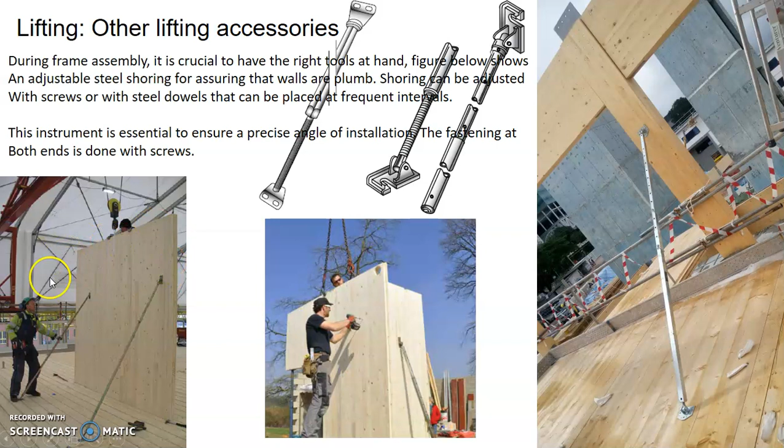This instrument is essential to ensure a precise angle of installation. Fastenings at both ends are done with screws. You need to temporarily stabilize the vertical element before it is connected by the rest of the member, and once it's connected and stabilized, you can remove it.

Another device is what you call the beam grip with ratchet and hooks, and this is how it looks. This beam grip with ratchet and hooks is primarily used to bring the panels together once they are supported, because when you are doing the lifting, it is impossible to lift it in such a way that it is perfectly aligned to each other. So there will be a gap. You use the beam grip with ratchet and hooks to close the gap.

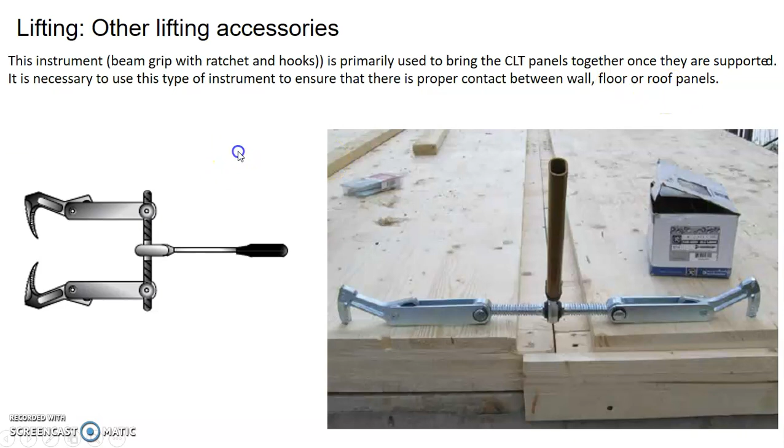It is necessary to use this type of equipment to ensure that there is proper contact between the wall, the floor, and the roof panels. You can actually use the beam grip to connect members that are perpendicular, ensuring proper contact between two panels that are installed perpendicularly.

Instead of hooks, the beam grip is used with two perforated plates. The beam grip is screwed onto the CLT wall and roof panels. The clamping is then performed, and the panels are screwed to one another using self-tapping screws or other systems. Tightening will ensure proper contact between the elements to minimize air infiltration, water infiltration, and sound transmission.

At the interface between the ground level concrete slab and the wall panel, the level may not be perfectly flush. So you need to use either steel shim plates or cement grout to ensure that the interface is perfectly flush. It is often necessary to use steel shim plates of different thickness under the CLT wall at the junction of the concrete foundations, for them to be perfectly square.

Once the wall has been properly installed and it is at the right angle, the gap is usually filled with a cement-based grout. It is important to use a waterproof membrane at the base, between the concrete and the wood, to limit the movement of water into the building.

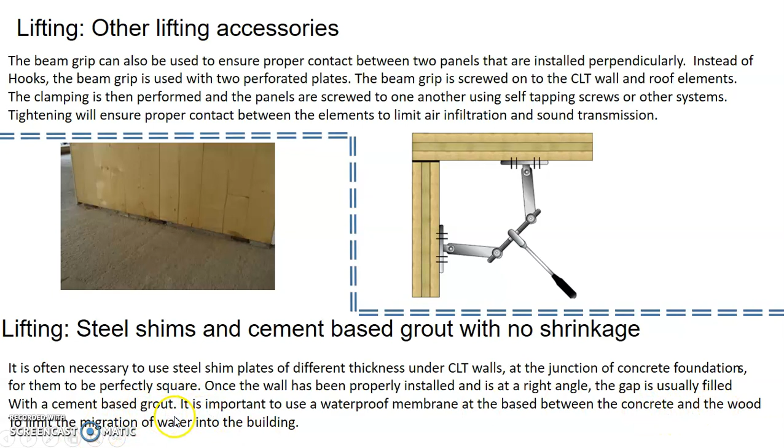Now, in terms of connection, you can actually go for the wood and self-tapping screw as a form of connection. The ease of installation and the high lateral and withdrawal capacity of the screws makes them quite popular amongst designers and builders, as they can take combined axial and lateral loads. The wood screws and self-tapping screws come in different sizes and specific features.

Self-tapping screws are available in diameters up to 14 mm and lengths up to 1.5 meters, while the common length could be around 1 meter. They do not require pre-drilling in most cases, unlike traditional wood or lag screws, which require pre-drilled holes, the size of which depends on the density of the wood-based material they are driven into, and the diameter of the screw. The design capacity of the screws in cross-laminated timber must account for the potential gap in the unglued cross plies and other artificially sawn grooves common in CLT fabrication.

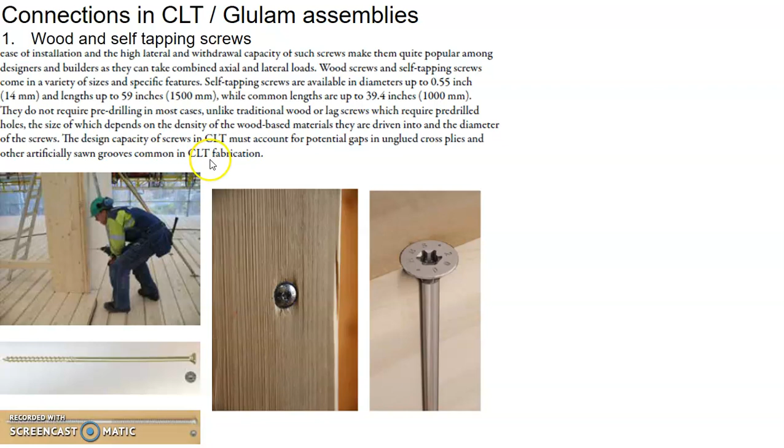So you can see here, for example, when the CLT beam member is supported at this edge, it may actually start to tear along the ply. So in order to minimize the possibility, you can reinforce this location by inserting the self-tapping screw. Or if the compression is very high, it's going to start to deform here, so you can improve the capacity by inserting the self-tapping screws into the member.

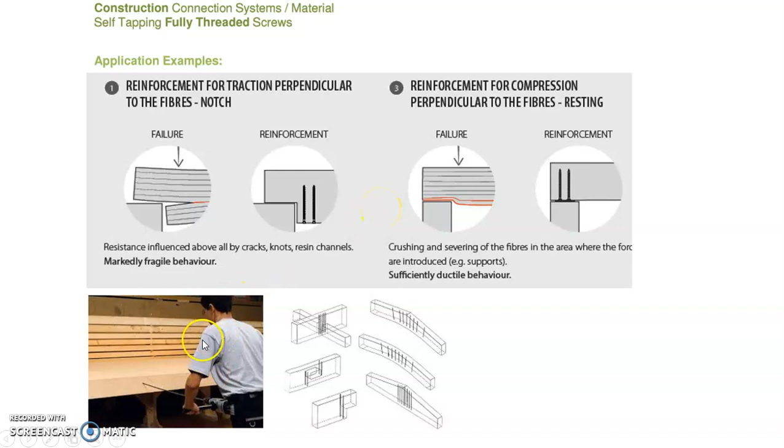So some examples of using the self-tapping screw to strengthen the CLT members or the GluLam members. You can see the worker installing quite a long self-tapping screw. The self-tapping screws also come in different sizes and different lengths, that's available.

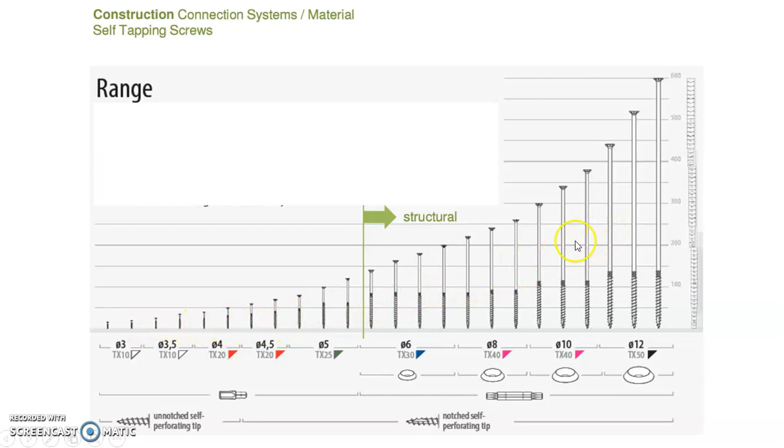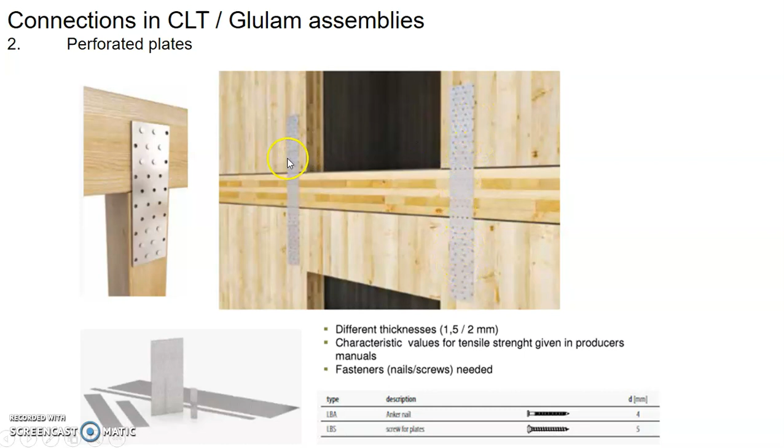Another way to do the connection will be using the perforated plates, and you can see how it looks like here. It comes in different thickness and different characteristic values for tensile strength, and you need to install the fasteners or the screws through the perforated plates. Different types of geometry can take tensile load in a transverse direction also, no problem.

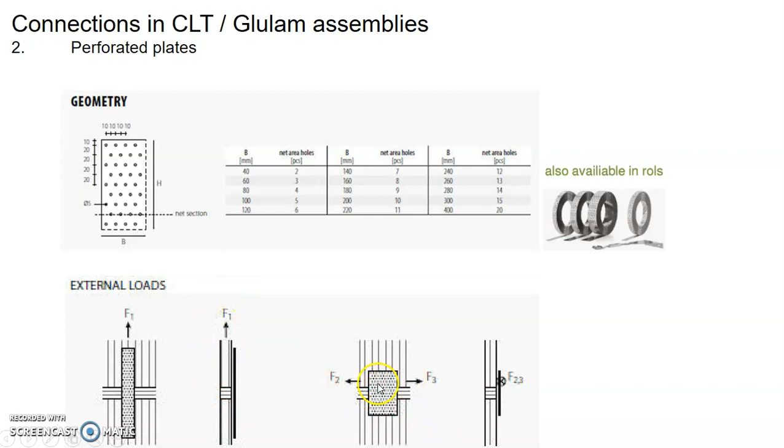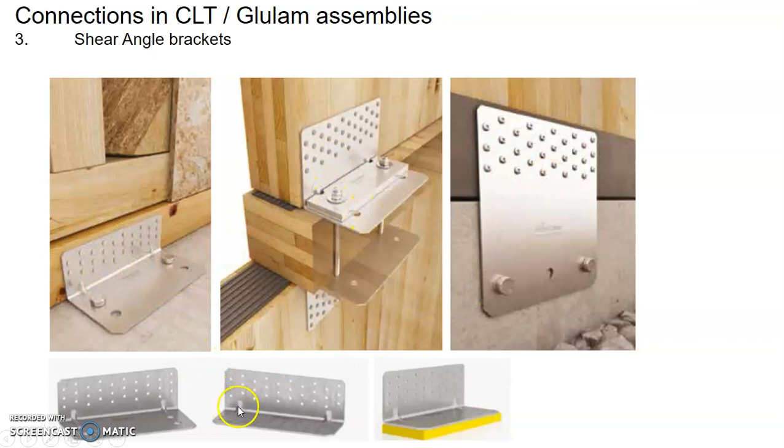You can also have what you call the shear angle brackets, and this is how the shear angle brackets look like. And this is how you can assemble the members using the shear angle brackets. You position the brackets at the location that you want to do the assembly.

Then after that you mark out the holes where you need to drill through the concrete element, for example. So then you remove the bracket first, and then do the drilling through the concrete. Then you clean the holes, insert the anchors, then insert the bracket, then after that you put in the timber element, then you do the fastening.

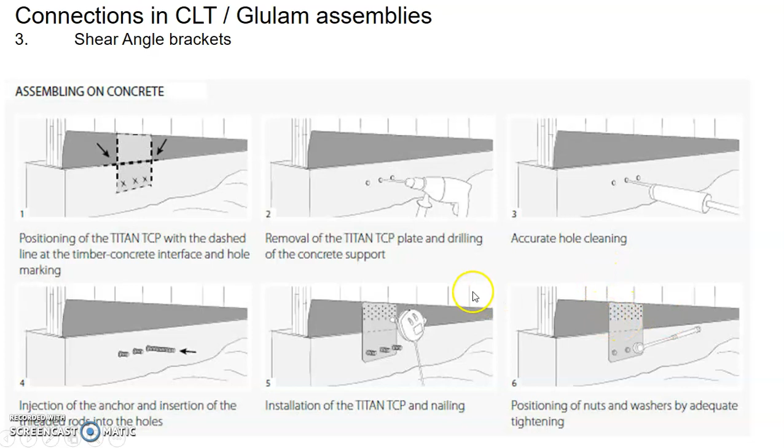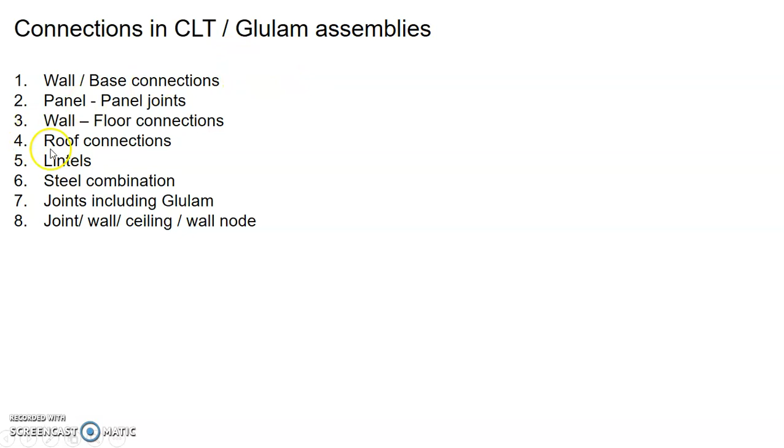Now you can actually connect the different panels or different members of the mass engineered timber together, and in terms of the flexibility of connections, there are many different connections available. So for example, wall to base connections, there are different ways to do it.

So you can see here, for example, this is one way, we call it the exposed metal plate connection. So this is the concrete footing, and if you want to install the timber wall panel on top, you can have a series of metal plates with anchor bolts and all that, then after that you install and connect in this way.

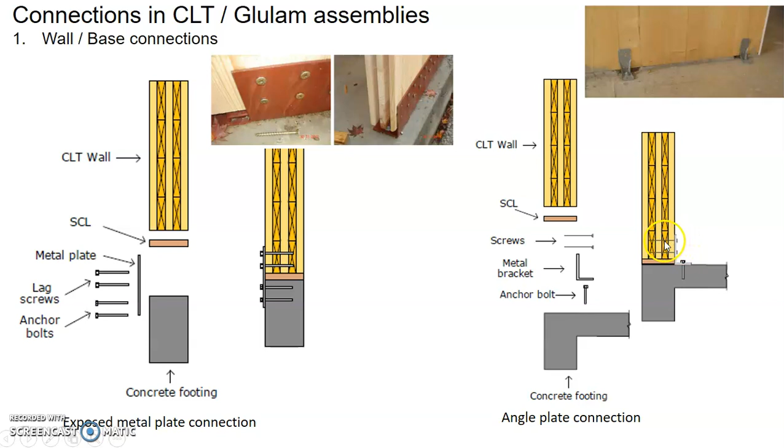That's one way. You can also go for an angle plate connection, where instead of using a metal plate, you use an angle plate, and the connection is done on this side. So it's bolted here, then after that you have the self-tapping screws, for example.

You can also go for a wooden profile connection, where you install the wooden profile so that the timber member can sit properly. The wooden profile comes in a different pattern.

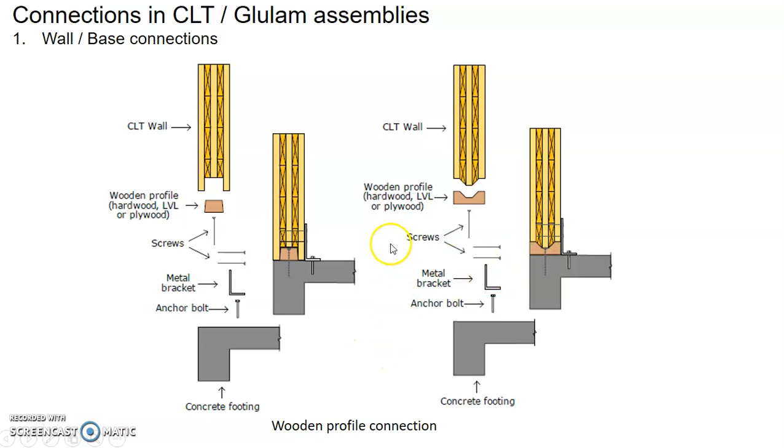You can also go for a concealed metal plate, where you install the metal plate, bolt it to the RC element, then after that your CLT wall comes with pre-drilled holes so that the holes can receive the steel plate. Then after that you insert inside, then after that you put in a dowel bar on both ends, alright, so that's how it looks like.

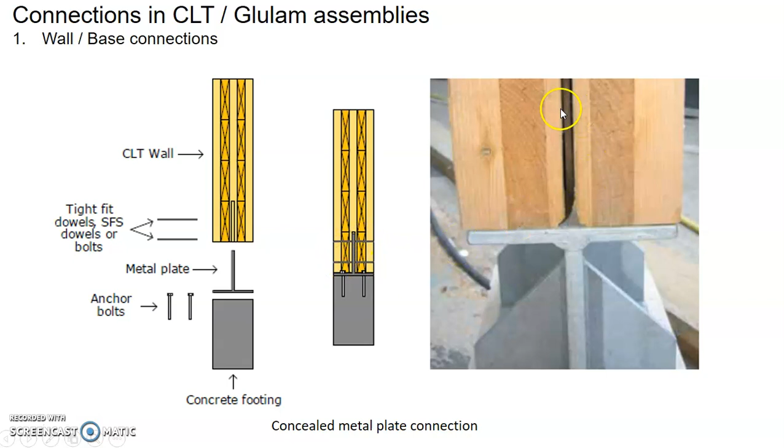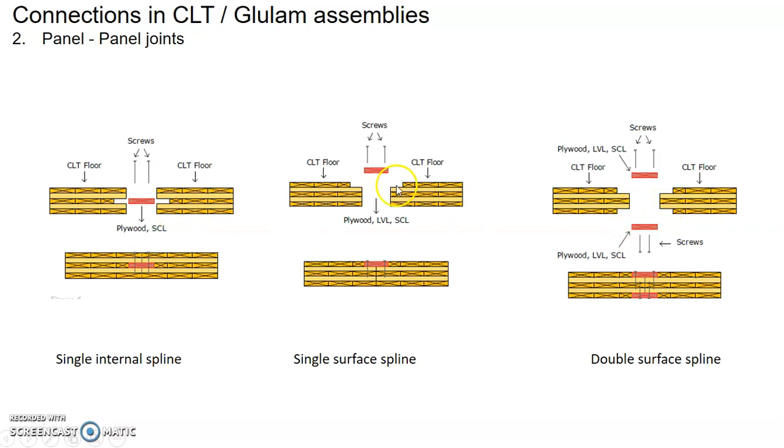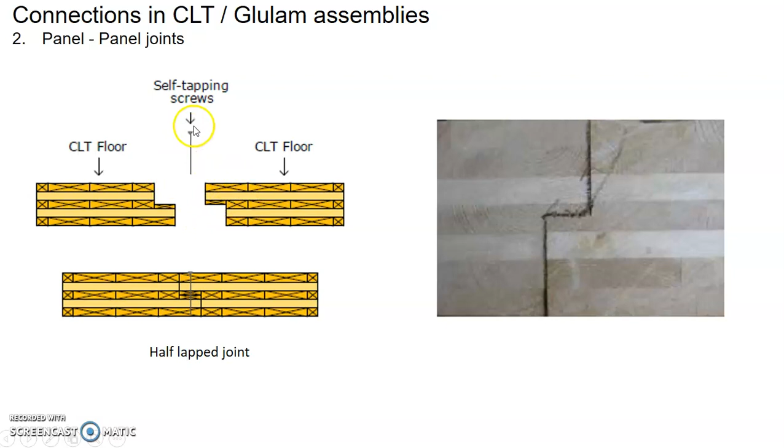You can also do what you call a half lap joint, where this is one half of the lap joint and the other half, you bring them close together and insert the self-tapping screw. That's how it looks like.

Or you can go for something a little bit more sophisticated, where you have this tube with the openings, and then you put it inside here and insert the screw rods on both sides, and then use the nut to tighten it. So this one is a little bit more sophisticated.

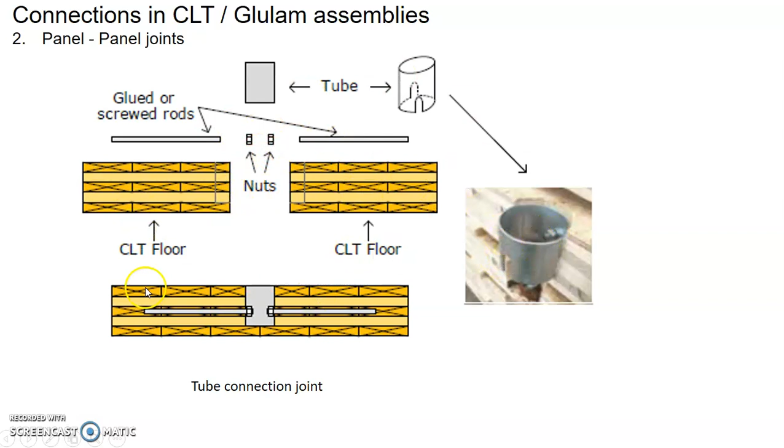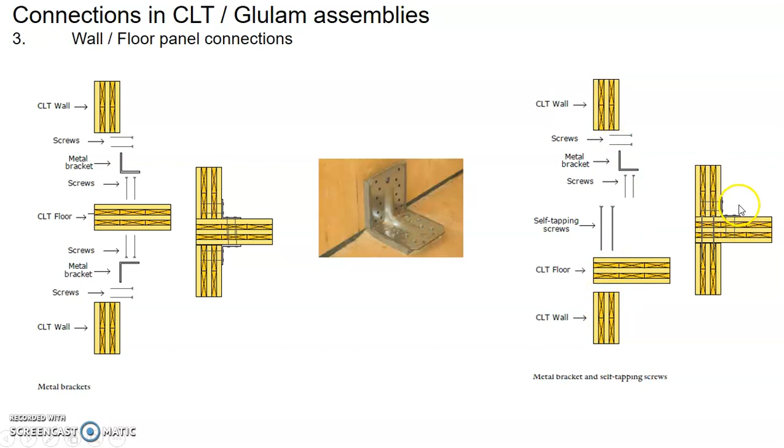So for the floor to the wall panel, again, different variations are possible. You can have metal brackets for both the lower unit and the upper floor, or you can just go for the metal bracket with self-tapping screws to connect the lower unit and the upper panel using the metal bracket.

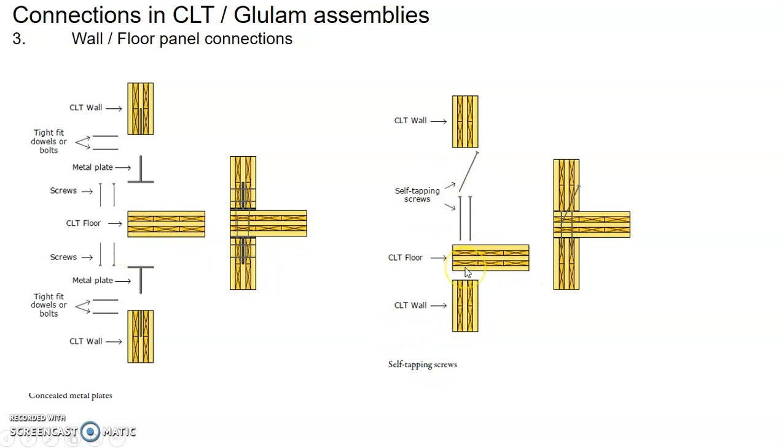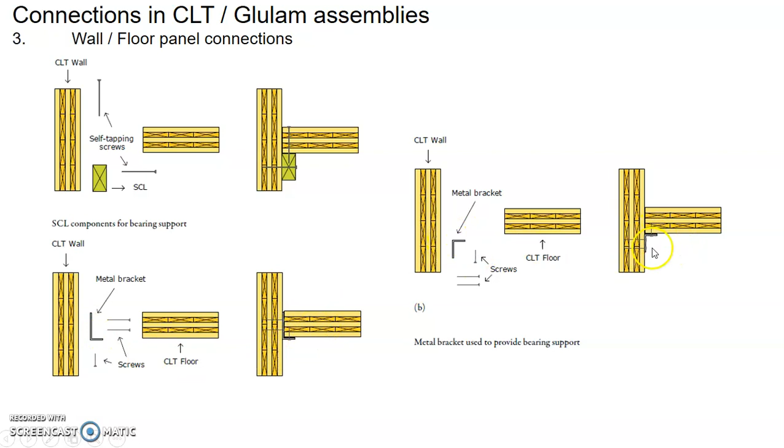Also various combinations are available. You can go for a concealed metal plate for both the upper level and the lower level, or you can use self-tapping screws between the upper level and lower level. Or you can have a bearing support, or this metal bracket support, which is also a metal bracket support but done in a different formation.

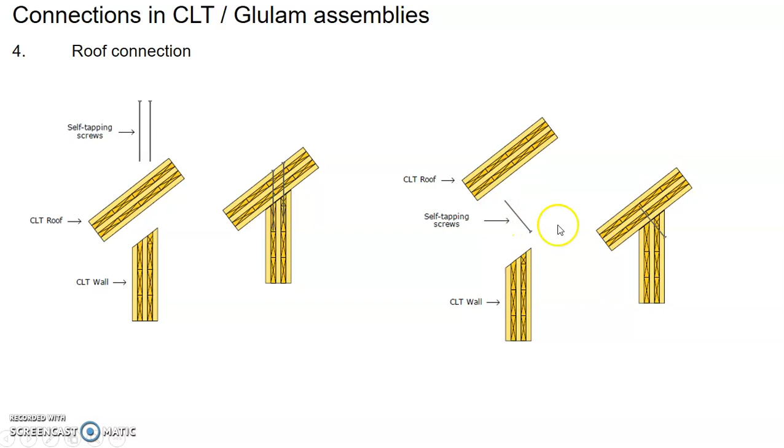For roof connection, you can have a self-tapping screw to do the roof connection for the roof member to the wall panel, using the self-tapping screw in a different connecting manner. You can also have metal brackets to connect the roof member to the wall panel members. So it's very versatile in terms of different ways of connection.

Normally what we do is check with the installer, meaning the people doing the assembly, to find out which method they are most comfortable or experienced in, so that we specify something easy to be done. There's no point specifying a way of installation that the site people doing the installation are not familiar with. You must check with them to find out what they are familiar with, and then design accordingly. That will be much better.

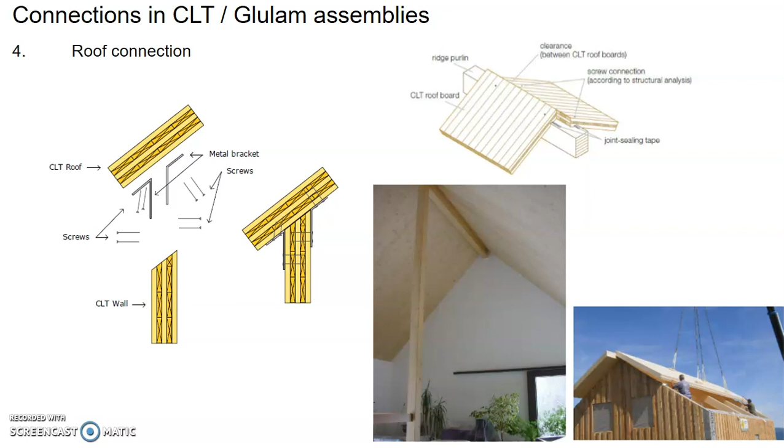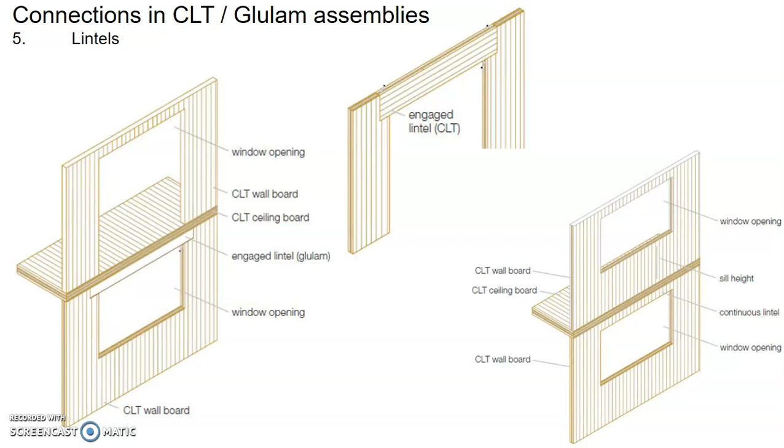Then these are some examples of engaged lintels and so on at different CLT projects.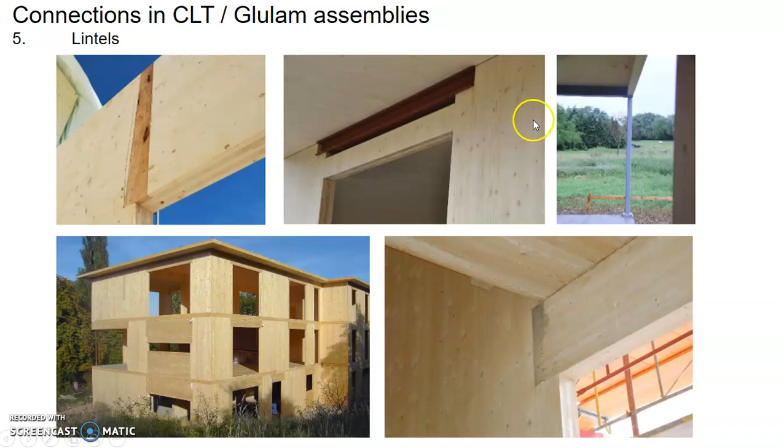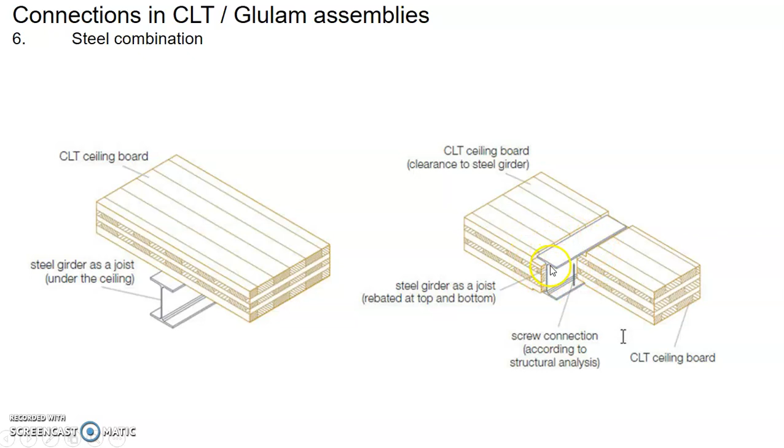So like I say, timber is very versatile. It can be connected to a steel member, and this shows you the connection to a steel girder as a joist under the ceiling. It can also be embedded through the flange and the web, so very versatile. This shows another variation where you insert this derived timber board, or you can have the gypsum fiber board and all that. So the versatility is there in terms of combination with steel.